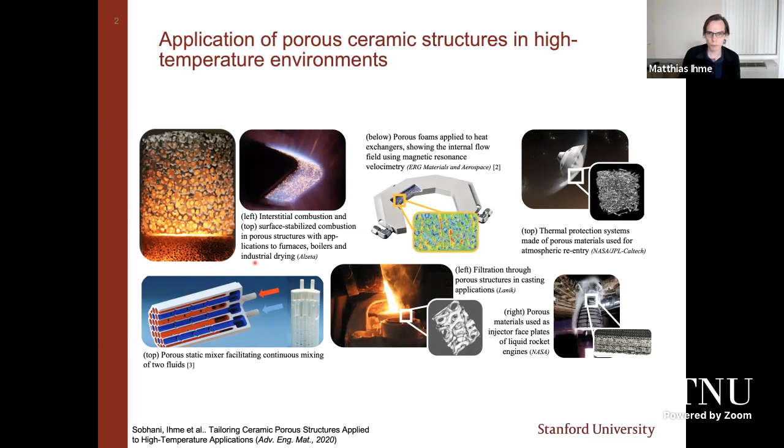To motivate this work, I have here a slide showing the emission reductions in aviation gas turbines for aircraft applications. What you should take away from this is nitric oxide, which is a very strong pollutant responsible for greenhouse gas emissions and ozone layer depletion. Over the years, there have been some rather aggressive goals of reducing NOx emissions, in this case nitric oxide emissions.

The latest stage was a reduction by about 12%. That's significant, and it tells us that conventional combustion technologies that you might be familiar with in gas turbine combustion systems are just not able to scale to meet those challenging requirements. At this point, about 4 years ago,

NASA initiated a research activity with the goal to identify novel combustion technologies that allow us to meet those increasingly stringent emission regulations, facilitate higher energy densities—meaning we want to liberate more heat for a given volume—and I'll show you some ideas on how we can achieve this. At the same time, we also want to push towards renewable and fuel-flexible applications, meaning the utilization of biorenewable fuels and alternative fuels.

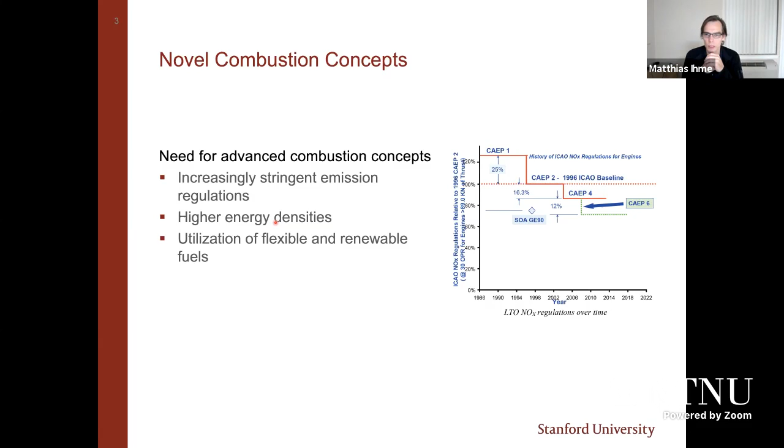Technologies currently used are challenging to scale or apply to different fuel systems. So what we decided to do is explore this concept of porous media combustion. I want to give you first a physical understanding of this problem, since not many of you are familiar with combustion in heterogeneous environments, then move forward to demonstrate feasibility and work towards the more advanced combustion challenges we seek to address.

What you're looking at here is a so-called porous media combustor. This porous ceramic structure, this metal foam or in this case ceramic foam, could consist of different materials such as alumina, silicon carbide, but also some zirconia stabilized materials. The pore size is somewhere between a few millimeters up to half a centimeter, 5 millimeters in diameter. You can see two different pore structures here, some very small pores and some very large pores.

The idea is that we are splitting this burner into two different sections. The first section is the so-called flame arrestor, the second is the combustion zone. We like to liberate the heat in this upper combustion zone, and the flame arrestor is installed so that we prevent the flame from moving backwards towards the unburned fuel mixture. So this is mostly a safety feature.

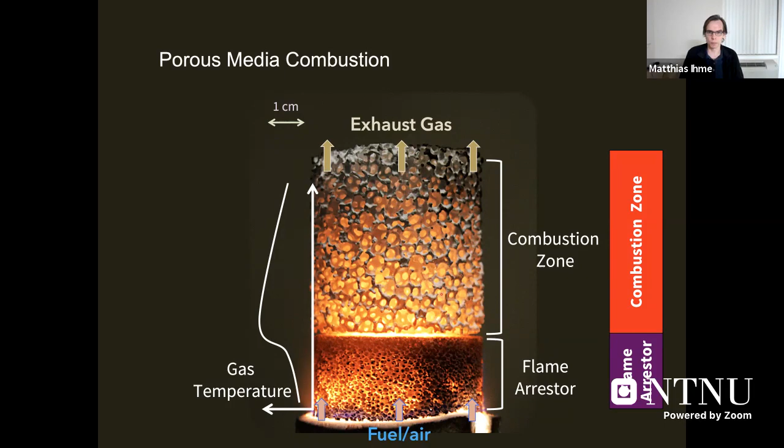In principle, we are injecting a fuel-air mixture from the bottom to the top. We are stabilizing the flame somewhere around this flame arrestor in this transition zone. We are extracting the combustion heat from the gas phase by the ceramic foam, conducting this upstream, and we have essentially a very efficient internal heat recirculation system. This is really the way for achieving these interesting combustion properties.

Why is this technology particularly attractive for a number of combustion applications? I'm thinking here of gas turbine applications, boiler systems, stationary power supplies, and stationary gas turbine systems. Number one, we can achieve an extended power modulation - this means the range over which we can operate the combustion system. In conventional combustion systems, this is typically a very narrow range because of this, whereas with the very strong thermal mass we have in this porous media, we can operate over rather extended operating conditions.

I'm going to show you in a second that this system is particularly attractive to reduce carbon monoxide and nitric oxides. These are pollutants which are heavily regulated, as I showed you in a previous slide. By utilizing porous media combustion, we can reduce those pollutants quite significantly for these applications.

We can burn at ultra lean conditions. What I mean here is, if I recall, combustion applications under ideal conditions burn at stoichiometric mixtures - this means we have the right amount of fuel and oxidizer so that we can convert all of these reactants into products. This is called a stoichiometric mixture. If you have excess oxidizer, you're calling this a fuel lean system or fuel lean mixture, and there will be a flammability limit where we just don't have enough fuel to burn all of the oxygen - this is called a flammability limit.

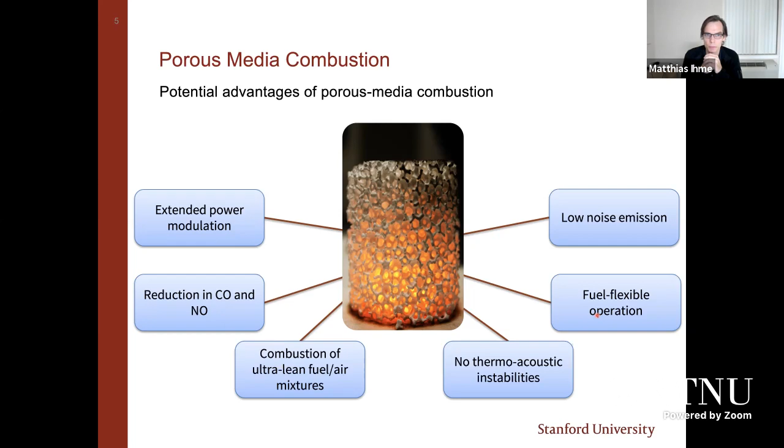Let me briefly talk about the operating principle, which I mentioned before. I have the same combustion system, but now I've rotated this burner by 90 degrees. The fuel or reactants come from the left-hand side. In this case I'm mostly looking at gaseous fuels, though we have also investigated pre-vaporized liquid fuels.

We send the reactants through this combustor because of internal heat recirculation, preheating the reactants between T3a and T3x -- this is the preheating zone. The combustion zone is a very thin layer where interstitial combustion occurs, seen here as the flame region. The second, rather extended cooling region is essentially there to extract heat from the combustion products, and with this we exhaust the system.

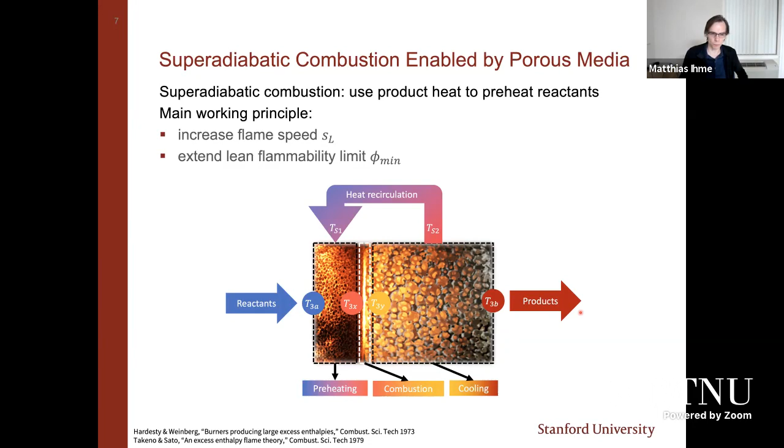Now, what we've done first is to convince you that this is actually a viable tool for gas turbine applications. Again motivated by NASA applications, we did a basic design analysis -- a thermodynamic analysis to investigate the feasibility of this porous media burner.

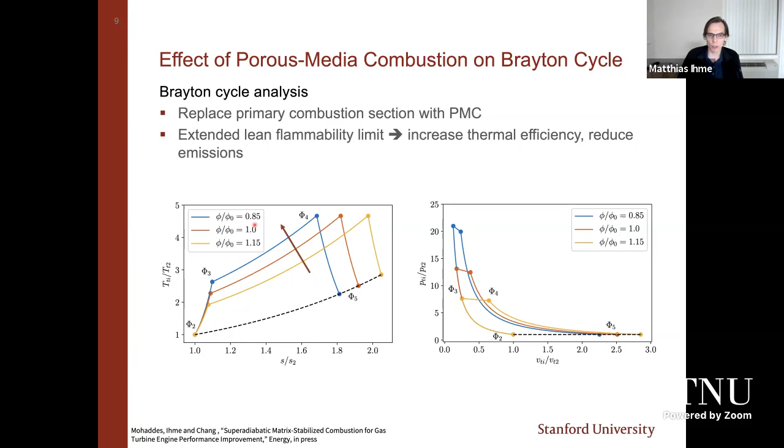What you can recognize here is that by utilizing different combustion operating conditions, fuel lean conditions as indicated by this value, phi over phi naught -- my notation for phi means equivalence ratio -- if this is 1, we are matching the notional operating conditions. If this is less than unity, we are operating under ultra-lean or leaner conditions. By this, you can see that we can operate the combustor at much higher pressure ratios, which is really a way to increase thermal efficiency.

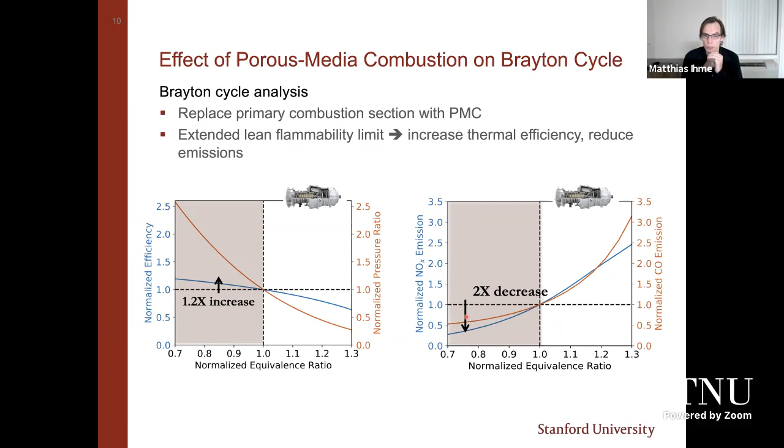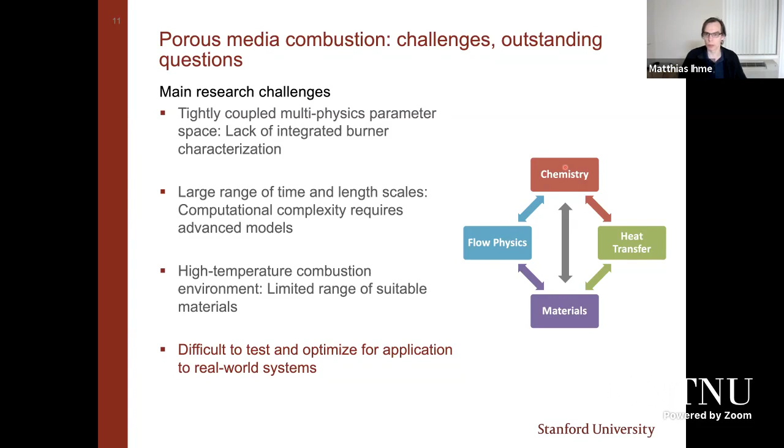These porous media combustors are rather complex systems, simply for the reason that they are integrated systems. We have to deal with the coupling between the flow physics, the strong heat transfer, the material properties, and the combustion chemistry. All of this makes it such an interesting environment that we thought it's worthwhile to develop a research program around this effort.

So what I want to do here, in the remainder of this presentation, is walk you through 3 different challenges that have to do with the characterization, the novel design, and the additive manufacturing of different or tailored porous ceramic structures, with the goal of increasing the efficiency and utilizing these porous media burners for combustion applications.

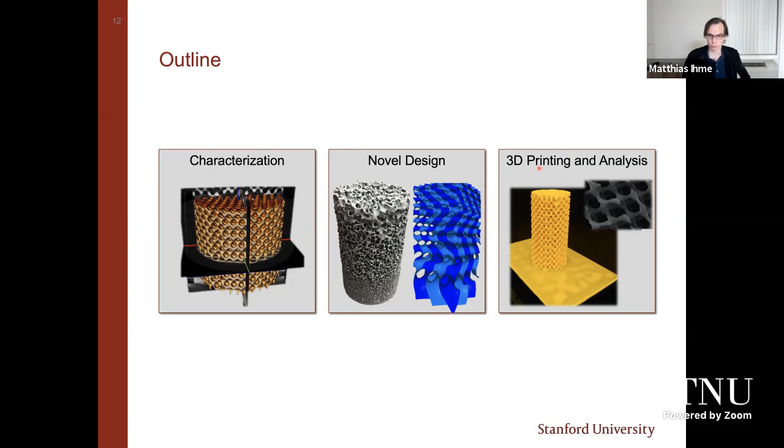So let me talk first about the characterization. Remember, in the first result, I showed you a theoretical analysis where we recognized improvements in thermal efficiency and reductions in emissions. The practical question here is whether we can confirm this through practical applications. In order to do this, I want to show you some variability in the combustion system.

As I said, a key aspect of these porous media burners is this very strong coupling between the combustion process, the heat release, and the heat recirculation. There are different requirements on the material properties. We need to sustain very high temperatures. The thermal expansion is a challenge, and this is really the material expansion due to the cyclic operation.

What you can imagine is we have very strong temperature gradients, so we want to make sure that the thermal expansion of these materials remains very small. Otherwise, we're losing the integrity of the structure.

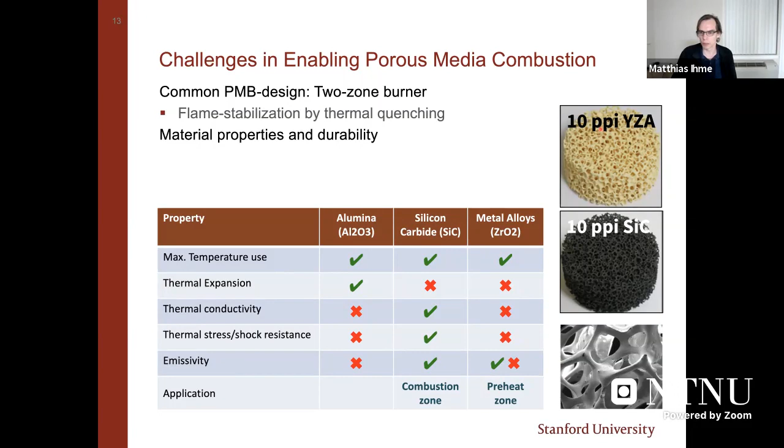I'm sure that you are very familiar with this. These are 10 pores per inch—we are here in America, we like to use units of inches. So this really translates to a pore size of around 2.5 millimeters. And the same is true for the silicon carbide.

To illustrate this, think about if you have a very low thermal conductivity, as for instance illustrated in this zirconia material, you can imagine this is a rather poor porous media burner in the sense that it constrains our operability. If you have very favorable heat conduction, for instance utilizing silicon carbide, we can extend the operability of this burner.

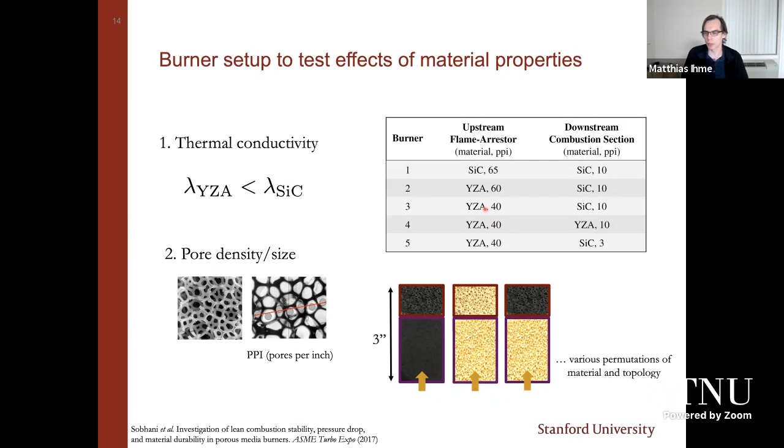To illustrate this, we've done different experiments with different materials in the upstream flame arrestor, where we're using silicon carbide and YZA, yttrium stabilized zirconia. In the combustion region, we're primarily using silicon carbide.

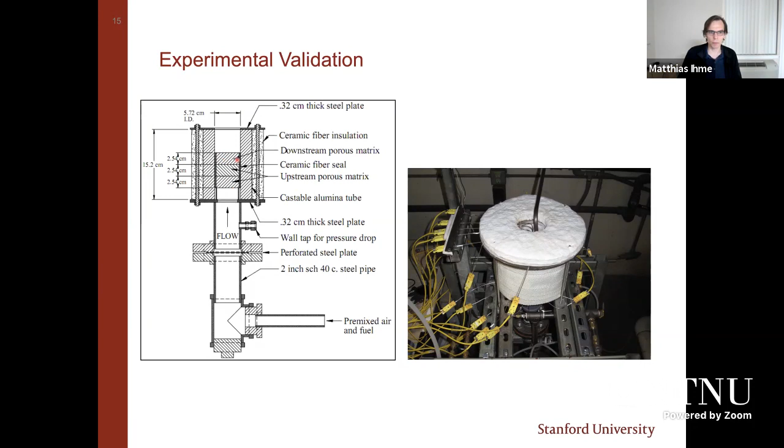So what I'm showing you here is a conventional burner setup. It's a rather simple setup where we're injecting a premixed fuel air mixture. You're recognizing here the 3 burners, the 3 porous media burners. They're insulated, and if you look in the system, the flame would essentially look like this red glowing system. What I want to emphasize is that's not the flame that's glowing, it's really the ceramic structure. We're really pushing this to the limit of operability, and it's essentially the light radiation of this burner that you're seeing here.

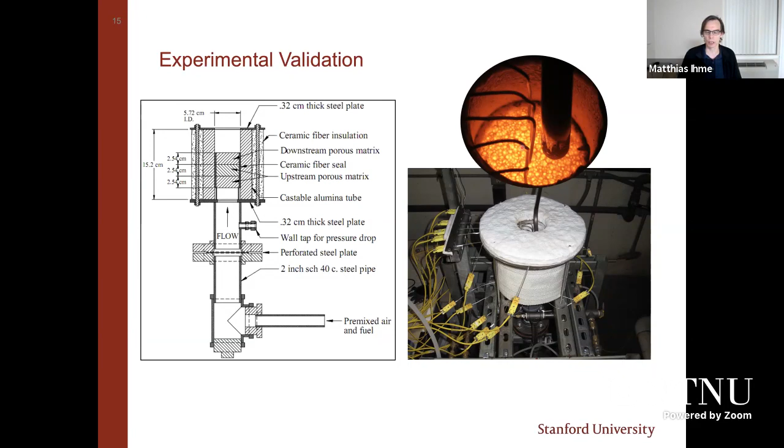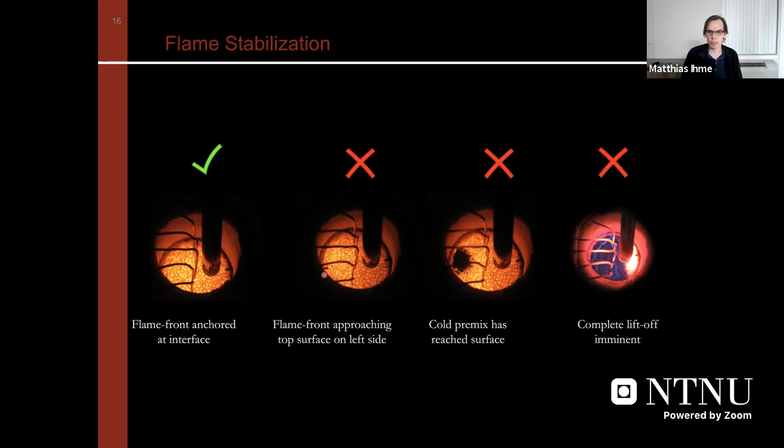In terms of describing the performance of these porous media burners, we're using essentially a visual inspection to determine flame stabilization. What you're seeing in the first system, looking from the top, is this very homogeneous flame temperature, this heating system, meaning the flame is well anchored. In this middle region, you're seeing the flame slowly starts to break through. We're seeing some dimming here, eventually loss of the flame, and in this final stage the flame detaches, pushed to the top of the burner. With this, we are not stabilizing the flame anymore, and it's lifted off. So this is essentially the instability limit.

What we'd like to do is determine the operability or flammability limit as a function of different operating conditions. For our case, this is notionally the mass flow rate, how much fuel and oxidizer we can send through this burner, and the equivalence ratio. Remember, the equivalence ratio is the ratio of the amount of fuel and the amount of oxidizer that we can burn, and we'd like to push this to very lean operating conditions.

For the first diagram I want to show you, this is a burner where we're using silicon carbide in both regions, the flashback arrestor and the combustion region. You're seeing typical stability limits illustrated by these lines here. These are measurements plotting the stability limit where we're retaining a flame as a function of equivalence ratio and the mass flow rate through the burner. The system is in a rather small region, simply because this is a silicon carbide system.

Now, if we switch the material properties to YZA in the preheat zone, remember zirconia has a very low heat conductivity, so this essentially prevents the flame from pushing backwards. There you're seeing right away that we get a much extended flammability or stability region, which makes this rather interesting for a number of combustion applications.

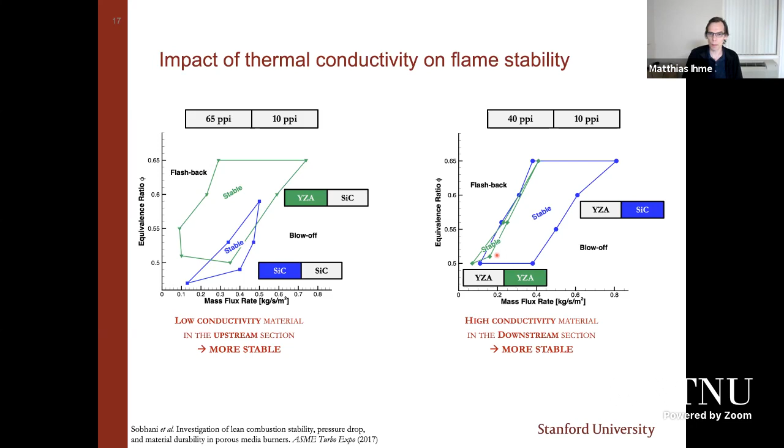For our combustion applications, pressure drop is an important factor. We measured the pressure drop for these experiments, and what you can see here is that the pressure drop doesn't exceed 0.4% with respect to the inlet pressure. This is a rather small pressure drop, and it matches the Darcy-Forchheimer relation quite well, giving us confidence that this is a reasonable estimate to assess the pressure drop.

Just to give you a reference point, for typical gas turbine combustion applications we're talking about pressure drops of about 3%. So this porous media burner is well below this stability limit. For different operating conditions, you're seeing that we are falling underneath this Darcy relation, meaning overall there are very acceptable pressure drops, and this is not a performance limitation for these practical applications.

Now, since this was a NASA-sponsored project, one goal was to demonstrate this also at high pressure conditions. What we did here is we utilized a high pressure test stand at NASA Glenn Research Center in Cleveland, Ohio, where they have a high pressure facility that is operable up to a pressure of 20 bars. We installed this porous media burner, did some tests here, and I want to share some of the results as I think they are interesting to demonstrate the operation conditions for high pressures.

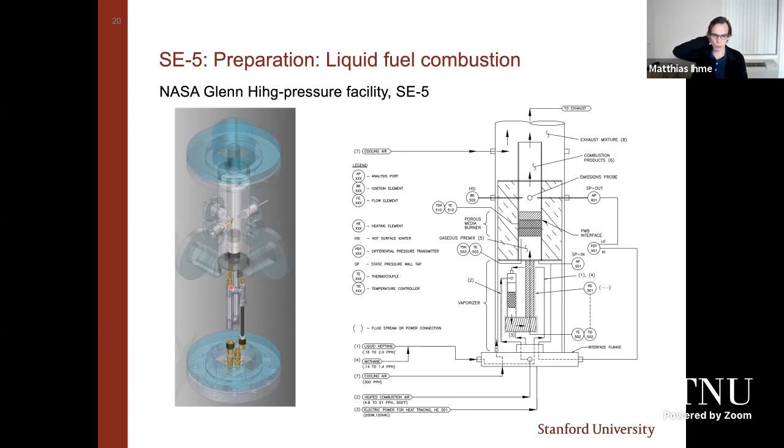Another challenge we are considering here is the application of liquid fuels. In addition to using methane as a primary fuel, we also considered heptane, in this case pre-vaporized heptane, in this high pressure facility. A schematic of this facility is shown here. You might recognize the porous media system here. Upstream of the system is our pre-vaporizer, essentially consisting of a liquid fuel supply which emits the liquid fuel.

I want to show you some of the key results from this porous media burner. Again, same diagram, done at different operating conditions. I'm plotting the equivalence ratio as a function of the mass flow rate. What you're observing here is significantly higher mass flow rates - we can push about 3 kilograms per square meter per second through the system.

And with increasing pressure up to 20 bars, we can also operate this at much leaner conditions. So this makes it very interesting for practical applications. We can push this to rather low operating conditions.

If you were to look at temperature profiles through the burner, I'm plotting here the axial locations through the burner. At the top is the exit of the burner, and then we're moving down. You're seeing that we have a rather broad flame zone, and the temperature is fairly homogeneous at these conditions.

If you're looking at different temperature regimes, you're seeing that at some point the flame detaches and pushes a little bit further downstream, but overall there's a very good representation of the flame profile, and we have a rather nice and stable temperature field inside this burner.

So this is again an illustration of the flexibility and versatility of this porous media burner. We can operate this at high pressures, and we're able to demonstrate rather low emissions and this extended flammability limit, which I think is a really attractive property. Now what I want to do is switch gears here, and address two aspects.

The first one is the material stability, and this is really the key limitation of these porous media burners. The second one is the selection of the design criterion.

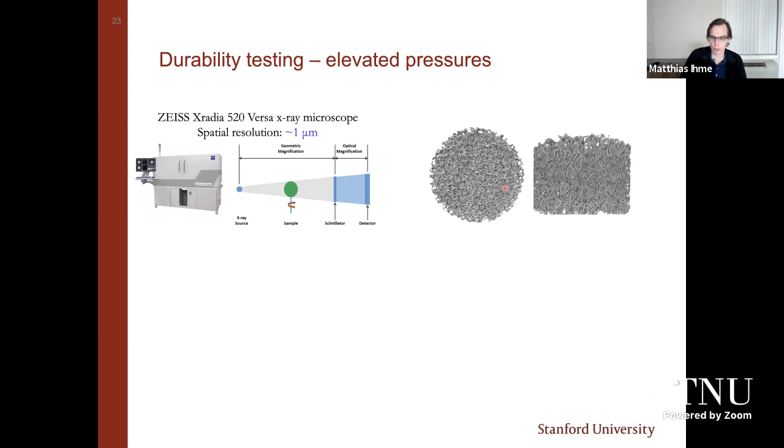We have taken some pre-manufactured porous ceramic structures, and if you observe them during the combustion process, we are essentially seeing the formation of cracks. These are micro-CT images at a spatial resolution of about 1 micrometer. Pre-combustion systems look very homogeneous, very well structured. If you're operating this for about 22 hours, which is a typical operating cycle, we're essentially seeing the formation of cracks inside this porous media burner and also some surface oxidation.

This is a limitation of these porous media burners, since we're using off-the-shelf designs and we have currently very limited control over the material properties. And we seek to address this challenge by introducing additive manufacturing so we can tailor and tune the design for these applications.

In the remainder of this presentation, I want to give you some ideas on how we now use computational modeling techniques in order to analyze, design, and tune, or in this case, optimize the porous ceramic structures. The next step is to employ additive manufacturing processes so that we can essentially manufacture tailor-made porous ceramic structures that are optimal for combustion applications.

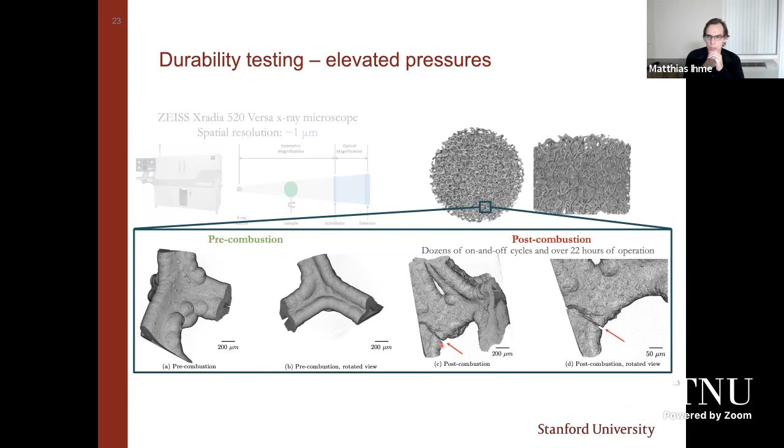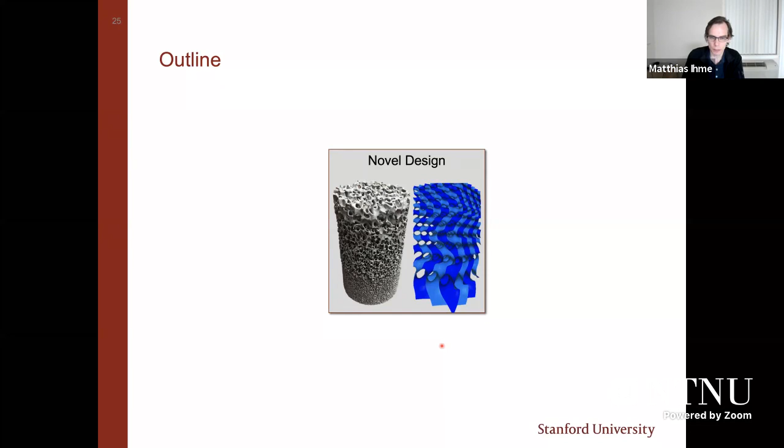Okay, let me jump to this problem, moving to the second topic: a novel design of this porous ceramic structure. Remember, we took off-the-shelf porous media structures, and here we want to see whether we can revise this to tailor it. For this, we're resorting to numerical simulations.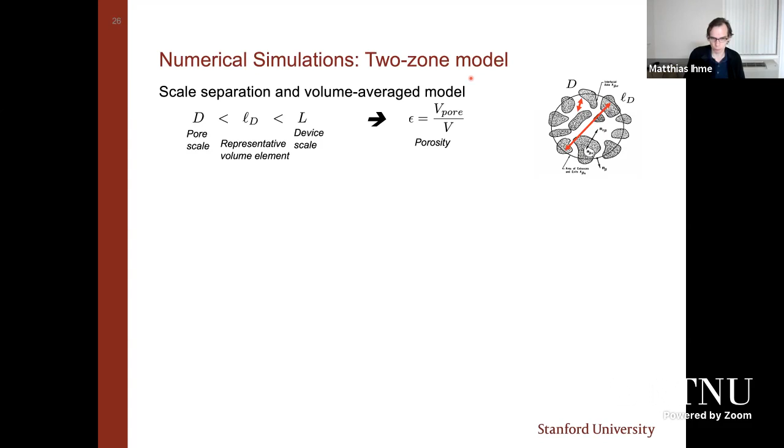We're using a so-called two-zone approach, which takes advantage of the scale separation between the pore size and the flow path. With this, we can write down a set of governing equations. I don't want to scare you, but I assume many of you are familiar with this formulation. This is a one-dimensional model describing the conservation of mass, chemical species, and energy through this porous media. X is the coordinate along the porous media burner.

Just to explain this equation a little more: the first equation describes conservation of mass. The second is a conservation equation describing the chemical species, where Y is the species vector. The epsilon you see is the porosity, comparing the pore volume over the total volume.

You're recognizing here a chemical source term. We have an energy equation with a contribution of heat release by combustion, and a heat exchange term by convection. This exchanges heat from the gas phase, denoted by subscript G, to the solid phase, denoted by subscript S. So we are exchanging heat between the gas phase and the solid phase.

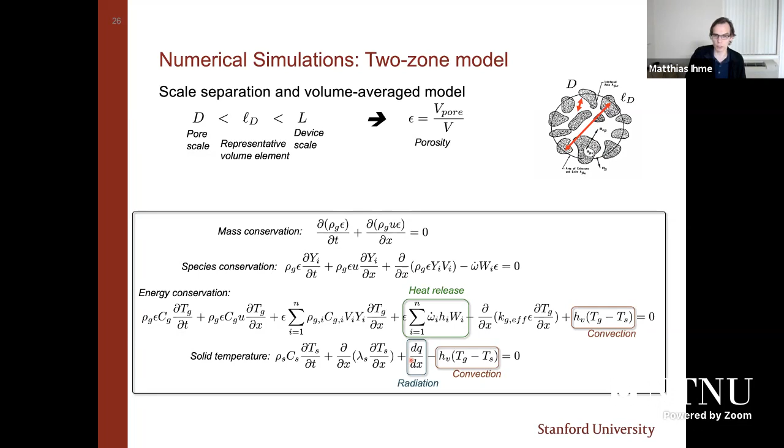This happens in the combustion zone, but at the same time we're also exchanging heat from the solid phase to the gas phase in the preheat zone. With this, we're coupling the solid to the gas phase just by the energy equation. If you look closely, you also have a radiation term, responsible for heat losses by this glowing process, which can be quite significant for certain ceramic structures. Now we can do some non-dimensionalization, which is really the motivation for this design we're utilizing.

If you normalize all the governing equations, you identify a ratio comparing the Nusselt number to the Peclet number. This is nothing else than the Stanton number, the ratio of interphase to convective heat transfer—the heat exchange between the solid and gas phase relative to convection. What we like to do is operate and tailor the system, as this is the key parameter to control the heat exchange between the solid and gas.

Remember, early on in this presentation, I showed you different material properties: YCA, yttrium stabilized zirconia, silicon carbide, and alumina. The combustion performance can essentially be explained simply by this ratio of the Nusselt number to the Peclet number.

For conventional combustion systems or burners that I showed you in the previous result, we can show that the Stanton number is a function of the mass flow rate through the burner and the pore diameter. By changing this, we can identify different regimes. For the burners I showed you previously, the step design, we see that we have two distinct pore diameters, and with this we're accessing a rather limited operation regime.

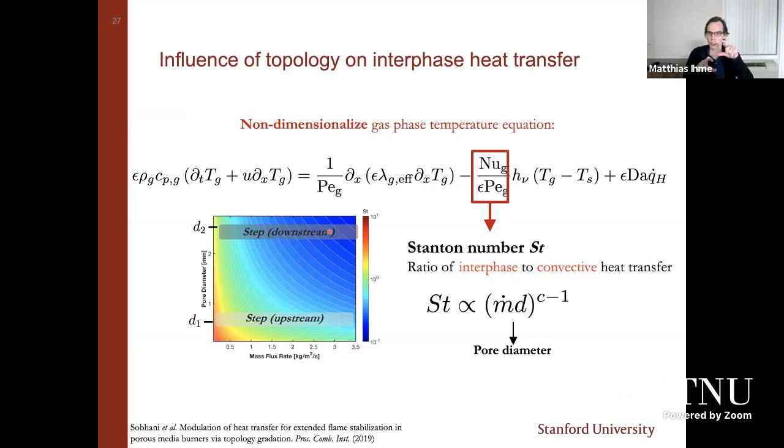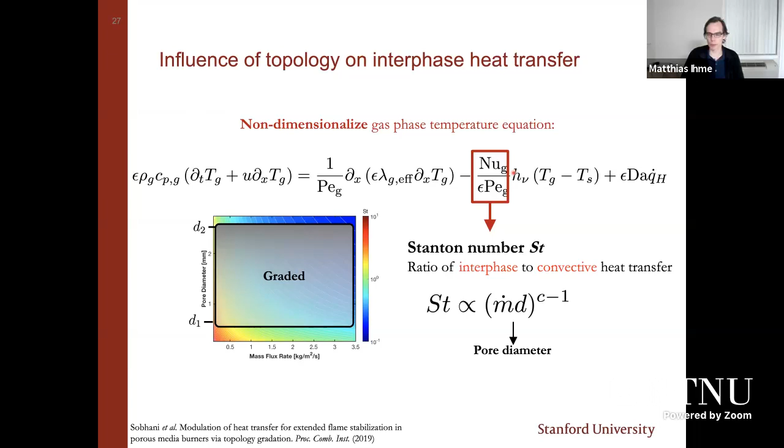Our idea was to broaden this by utilizing a continuously graded porous media burner. So instead of using two discrete porous media or zones, we're thinking about continuously changing the pore diameter and porosity, enabling access to this entire combustion zone. This was motivation driven by our theoretical analysis, and what I want to show you next is essentially the performance difference of these two burners.

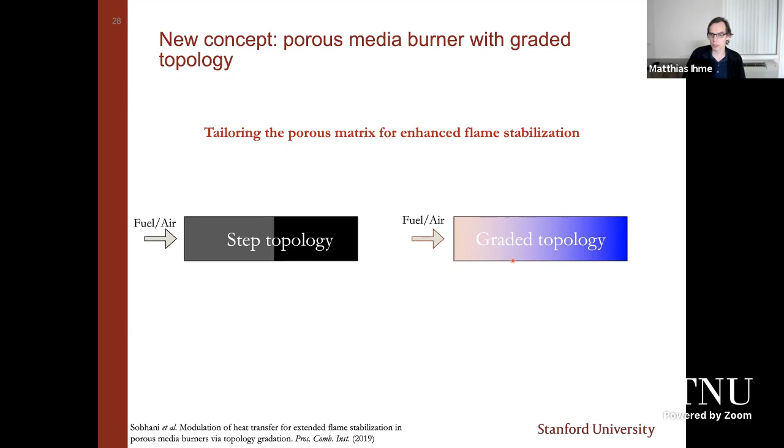Here I'm contrasting the step or two-zone burner, where we have this preheat zone and combustion zone, against this graded topology, where we're continuously changing the pore diameter and porosity throughout the burner.

Again, looking back to the stability diagram, plotting the equivalence ratio as a function of the mass flow rate, this colored region is the stable operating point. I'm showing here some measurements in yellow, just to confirm that this simulation result is essentially verified and validated.

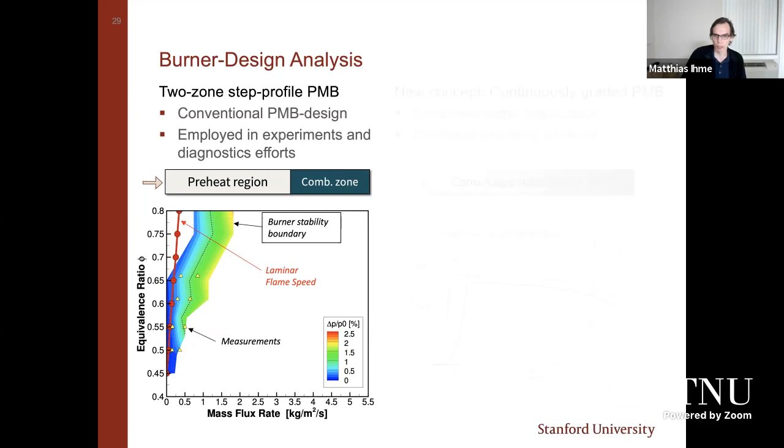For comparison, I'm also looking at a free flame system. Now, this is our prior burner that I showed you experimentally in the first part of this presentation. If you now look to this continuously stabilized burner, where we're changing the porosity and pore diameter throughout the burner, you can see the flame is now not anchored at this interface anymore.

It can float freely throughout the burner, and depending on the mass flow rate and operating conditions, you can achieve different combustion zones. This makes it rather interesting, since now I have a much broader range where I can operate the porous media burner.

This translates to a significantly extended operating regime. Here, computation results show this color-coded region is the stable regime, and you're seeing right away that from a stability range of about 2 kilograms per square meter per second mass flow rate, we can extend this almost by a factor of 3, making this a rather interesting porous media burner design for this application.

So here the key message is that we can significantly extend the stability limit for this burner. At the same time, as I'll show you in a second, we can also reduce the emissions simply by taking advantage of this broader operation regime, allowing the flame to stabilize at different locations. This is facilitated by the continuously graded burner design.

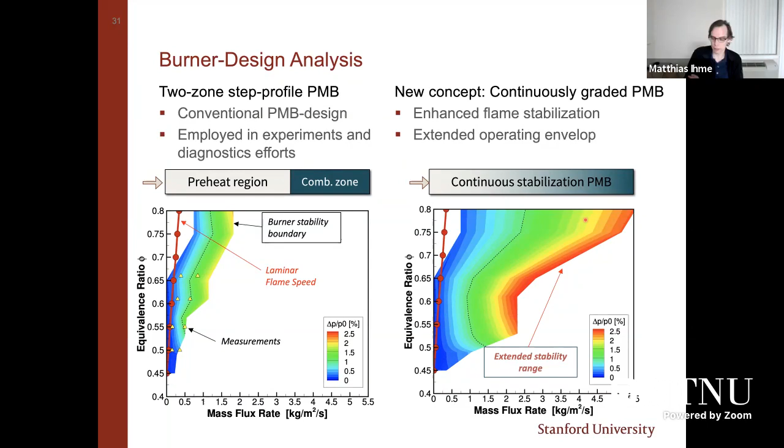Now, two questions arise. The first is, how can we manufacture this burner? The second is, is there any way that we can experimentally verify this? I want to show you this in the next slide, where we go through this process.

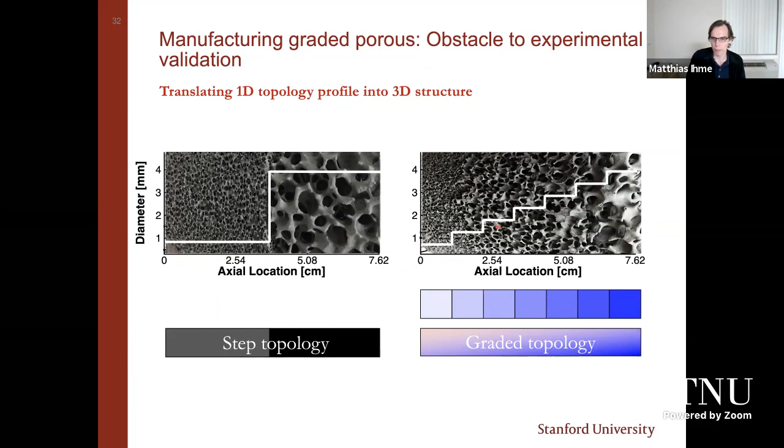As I said, our ultimate goal is to do this continuously graded design, and we work with different companies to facilitate this first design. This is essentially just taking existing technology and adapting it to our environment. These are systems from 3 different companies.

We work with Ultramet, a company here in the US. We work with Lanik to get a similar profile, and EngiCer is another supplier where we were able to stack the different structures. But what you're seeing is, as I said, suboptimal—you're seeing some gaps, some cracks and fractures here. So this is certainly not the best design, but it turns out we're already getting some indication that this concept works. Really consider this an intermediate step.

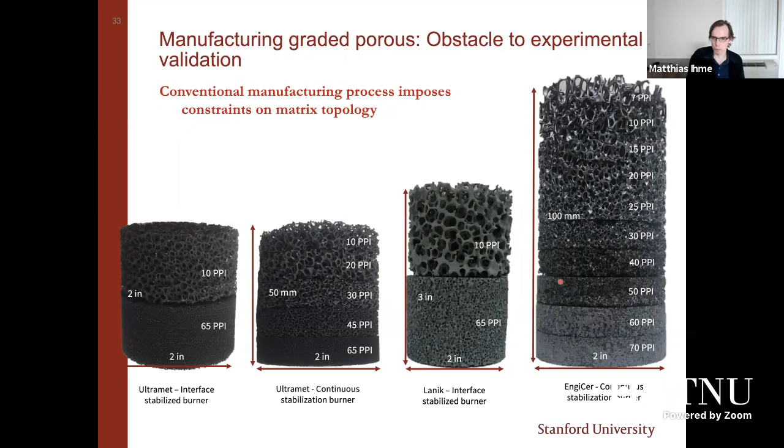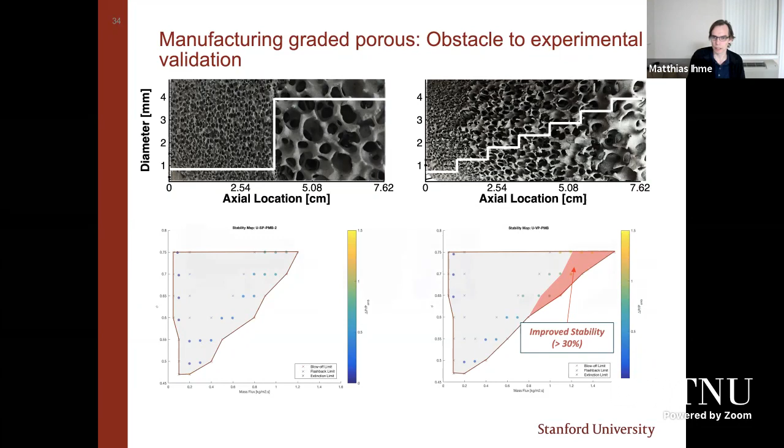So then the next question is, can we do better? And the answer is yes. Here we are resorting to 3D printing and additive manufacturing in order to get an optimal design of this porous media system.

As many of you know or are very familiar with, 3D printing or additive manufacturing is quite a common technology right now.

You certainly encounter this on a daily cycle. The key challenge here is that since we are interested in high temperature materials, and in addition interested in ceramic materials, this is a rather hard proposition to utilize additive manufacturing processes, simply because manufacturing ceramic materials is a rather challenging endeavor. What we are resorting to is a so-called...

...lithography-based ceramic manufacturing system, which works essentially in a slurry setup. I'll show you this in a second. This is one technology that allows us to print ceramic materials in a 3D fashion. By using this LCM, lithography-based ceramic manufacturing, we have fairly good control over the accuracy of the pore structure in replicating the CAD drawing, and at the same time good control over the material properties of the ceramic structure.

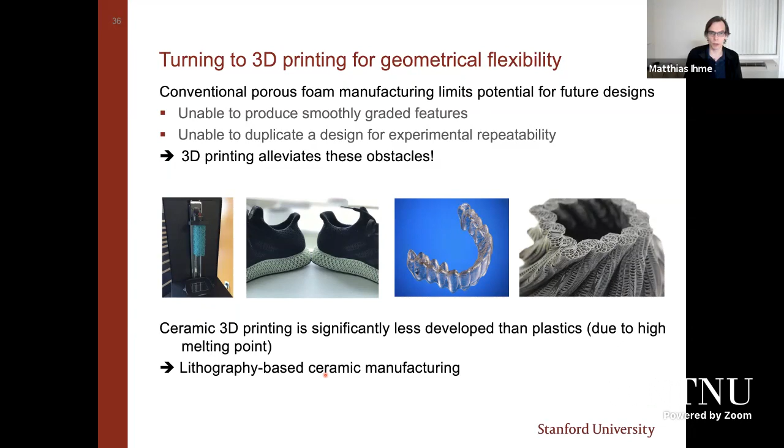Then we're using photopolymerization, which is essentially a light exposure on this layer. This essentially retains an initial structure. The final part is then facilitated by a sintering process, where we get our final processed parts that we then eventually characterize and employ in practical applications.

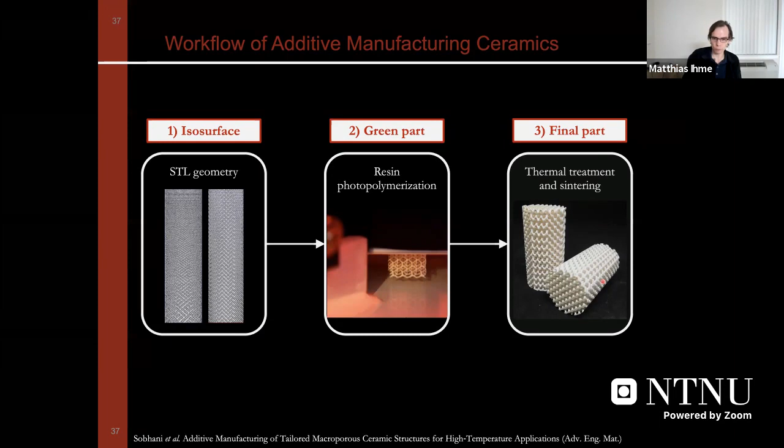So here, in order to design a ceramic structure, we're relying on a predefined topology. This is referred to as triply periodic minimal surfaces, which is essentially trigonometric or harmonic structures combined in different ways. We have here the flexibility of changing parameters, most notably the wavelength, or this pore diameter omega, and also an offset parameter q.

Depending on this, we can manufacture different structures. I just want to show you one of these designs by looking at this diamond structure, where we're getting very homogeneous or regular pore sizes, and we are achieving a stratification in the pore diameter along the axial direction. This is exactly what we wanted to achieve with these continuously graded porous media structures.

So what we're seeing here is we are imposing a linear gradation of this wavelength parameter and also a linear gradation of this offset parameter q. With this, we can tune different parameters under constraints of porosity and pore diameter. This essentially turns out to be an optimization problem that is rather easy to solve computationally.

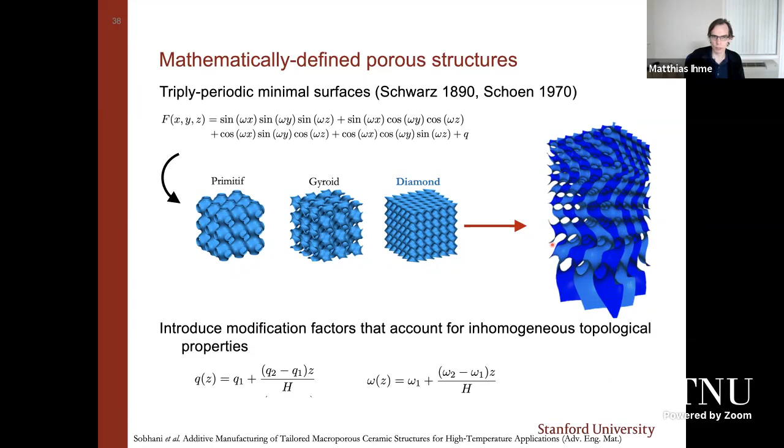Of course, the pore diameters we are considering here are fairly small, somewhere between 200 micrometers to a few millimeters. This is still a rather challenging endeavor, simply because the pore structures or pore diameters are rather small, and with this, the strut sizes are fairly small. This puts quite a bit of pressure on this.

We worked quite extensively here with Lithoz, the 3D printing manufacturer, in a rather iterative way to end up with a design. But you can see that many of our structures initially looked like this, where we see complete damage, and through this very close and successful collaboration with Lithoz, we essentially were able to achieve the desired performance.

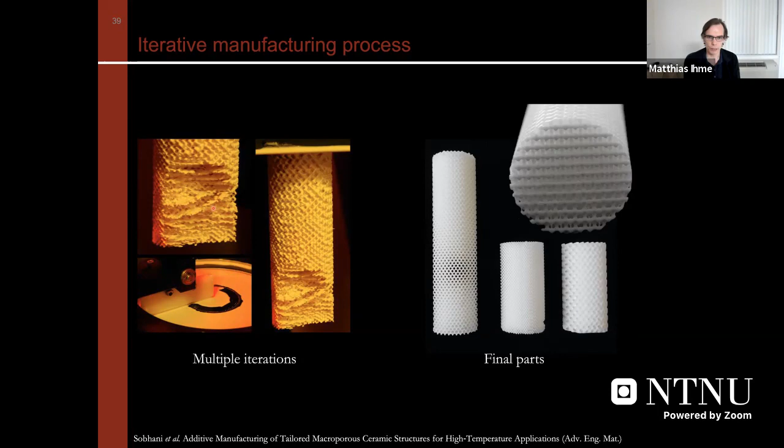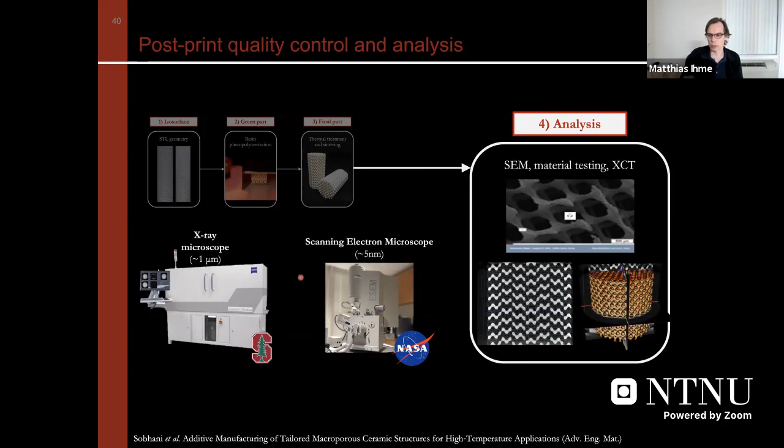So in total, we have the manufacturing process. We did the analysis, and I want to show you some of the results where we employed SEM and an X-ray tomography system to look at the pore structure and the material stability during the combustion process.

The first result that I want to show you is an SEM image of this pore structure. You're looking here right inside the structures. The scale is about 500 micrometers, and you're clearly seeing the formation of the pore topology, the layer material here, where we're essentially using this sintering process with these very fine structures.

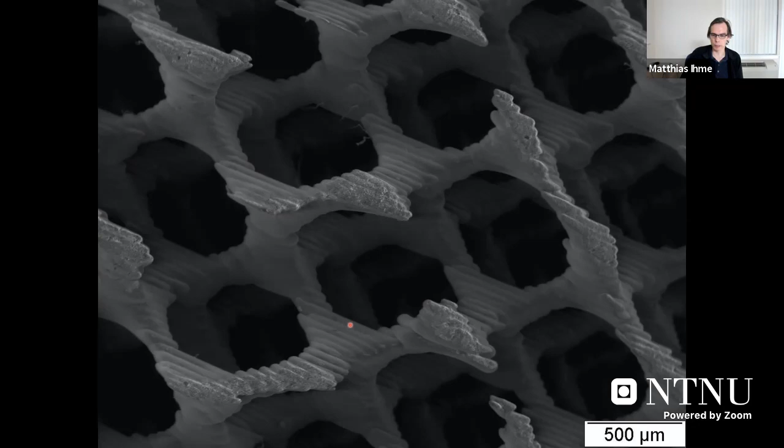Turns out that the layering thickness, how you're operating this manufacturing process, determines the stability, and with this we can also control the thermal properties. I want to show you some results of this as well.

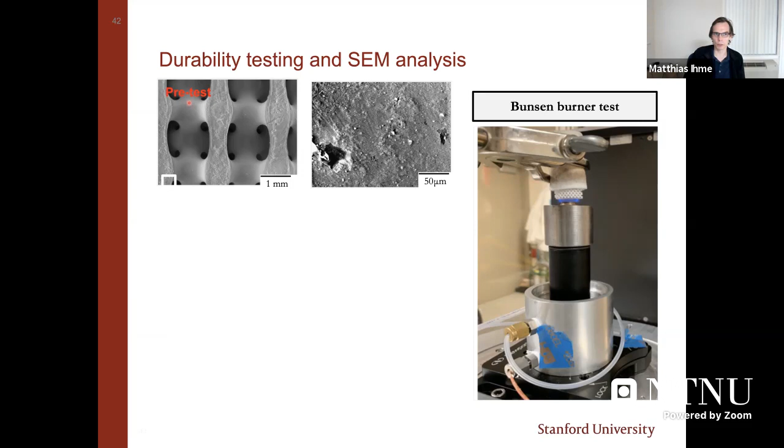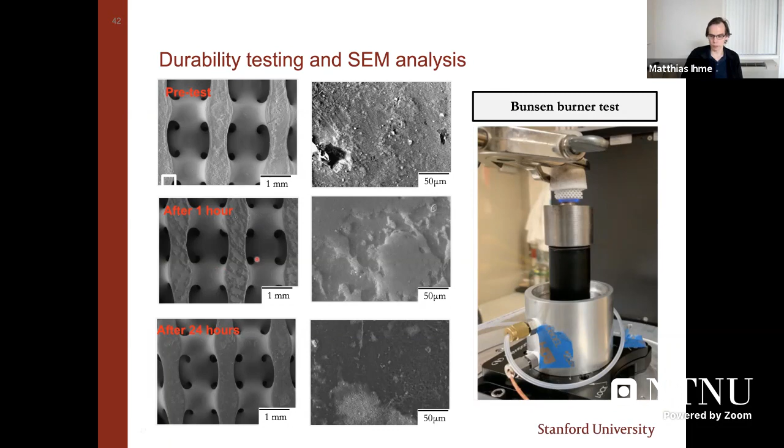Next, we operated this burner that you can see here in this setup, in this high temperature environment, where we essentially exposed this to a combustion product and performed a cyclic operating test, or durability test. I'm showing here SEM images of the structure pre-testing, after 1 hour, and eventually after 24 hours. What we observed is that for this silicon carbide, we didn't see any thermal degradation, which allowed us to demonstrate the viability of this system for high temperature, long-term exposure.

Another property that is critical is the thermal conductivity—how fast are we conducting heat through this pore structure?

Here we explored the feasibility of using different sinter materials and different particle diameters, illustrated by parameters A and B. Depending on the particle diameter, we can control the conductivity.

The second parameter is the layer thickness. Remember, the first layer thickness I showed you was somewhere around 25 micrometers—this is our sintering layer. By modulating this between 25 and 50 micrometers, we can get different thermal properties, which makes this rather interesting.

The summary is illustrated here. We did some conductivity tests, and depending on the material properties, we get a rather wide range of operating conditions in this porous media burner using additive manufacturing. With this, we have very good control over the burner characterization.

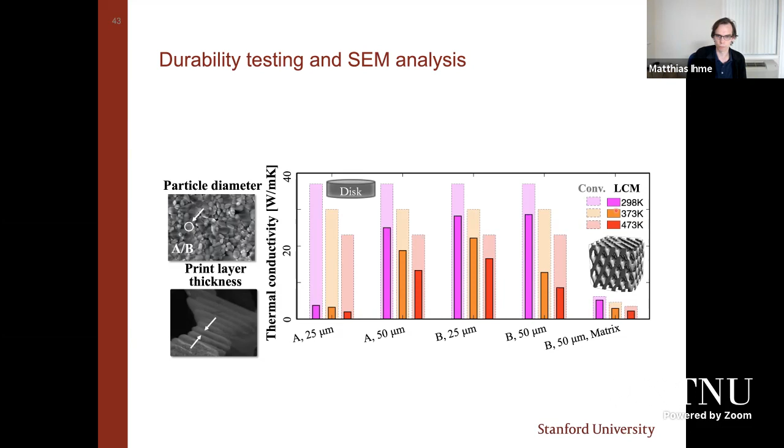The faithfulness of the process is illustrated here. What I'm showing you is a CT reconstruction of the pore sizes—the STL geometry and the XCT geometry. For the pore diameter, we're doing very reasonable.

Black is the post-processed or manufactured structure. The blue line is the initial geometry. We were aiming for a homogeneous porosity.

We were not quite able to facilitate this, and the reason is that we're generating additional material separation on the strut sizes, which changes the porosity, but the pore diameter is very well captured in this environment.

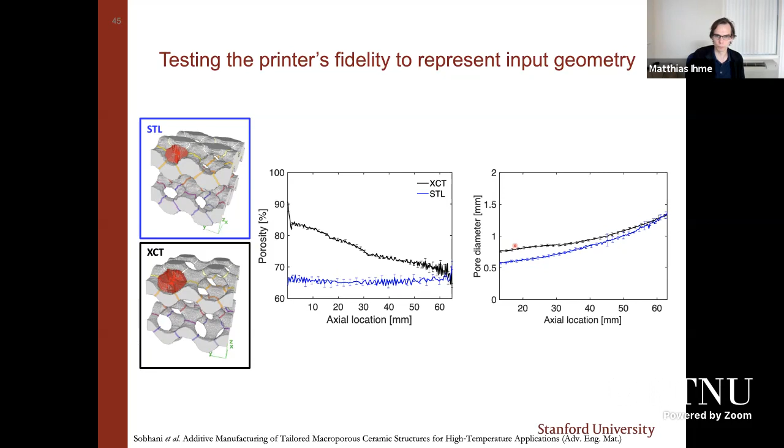The last test I want to show before I close is the burner testing. Remember, we set out to demonstrate an extended flammability limit, an extended performance behavior of this additively manufactured porous media burner with tunable structures.

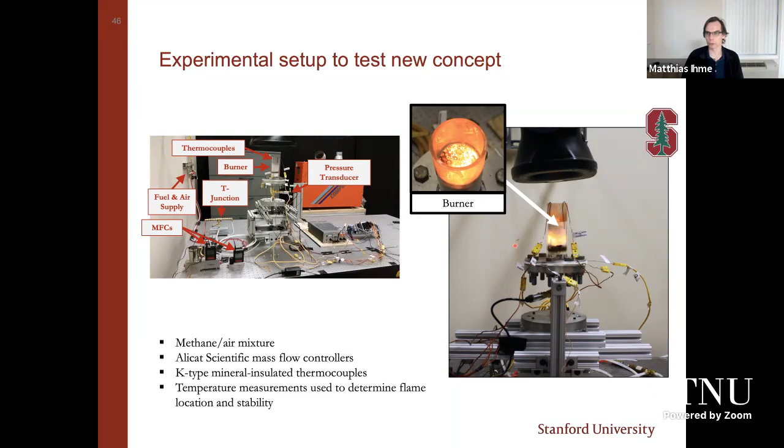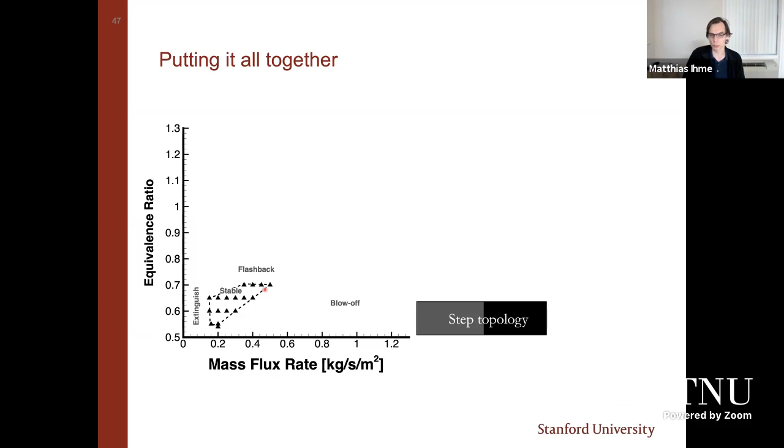By utilizing this continuously graded system, you can see that we significantly extend the operability to extremely high mass flow rates. We had to cut off at some point simply because our mass flow controllers were maxed out.

Overall, you're seeing that this graded topology, in conjunction with additive manufacturing processes, allows us to tune the performance and at the same time get an extended operability of the porous media burner.

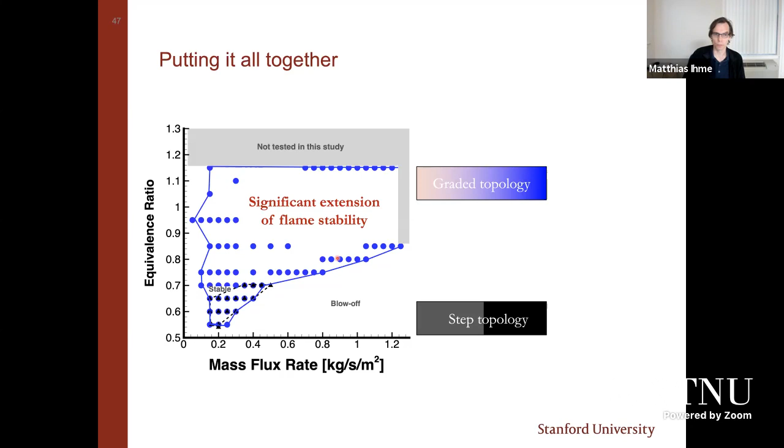So let me conclude here. I showed you a process with the goal of exploring and advancing the utilization of porous media structures for combustion applications. I showed you a theoretical analysis that demonstrates the potential of this technology.

We demonstrated the feasibility at high pressure and liquid fuel operation, and then we moved into the design process of exploring continuously graded porous media burners.

I showed you a design process that combines computational optimization using triply periodic structures in conjunction with additive manufacturing processes, so that we can go all the way from practical realization to testing.

We saw a significant extension of the operability limit, but there is still more work to be done, and this has to do simply with the manufacturing process. I think right now we are hitting the limits of the manufacturing process, and there's more opportunity to advance this technology.